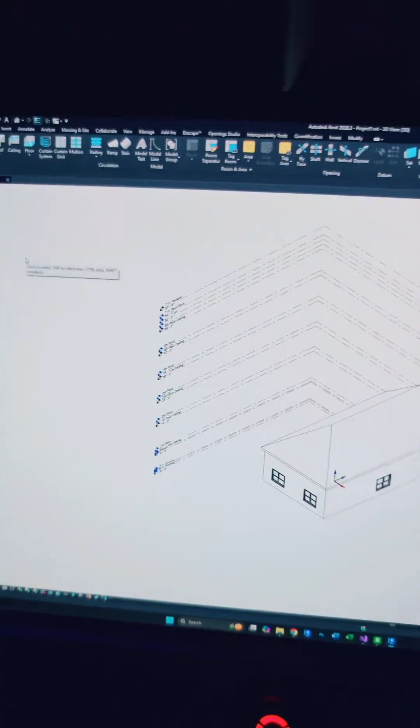Okay, so here's the model. Very simple. It's got a roof, it's got a floor, it's got walls, it's got a door, it's got windows.

So in the 3D view, I'm gonna go up here to add-ins, my external tools, my AnansiBuild. And then the first thing it does...

Sure, the first thing it does is check to see if, at a scale—and it's only doing a couple engineering scales right now—does it fit on the print bed? Of course, I'm being selfish, so I chose the print bed that I have set for myself.

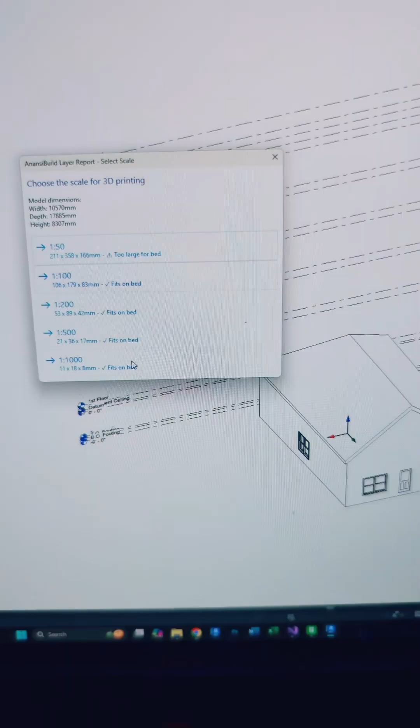So let's choose a different scale. I've done the 1 to 1,000, 1 to 100, 1 to 50. It doesn't fit. Let's do 1 to 200, just for the heck of it.

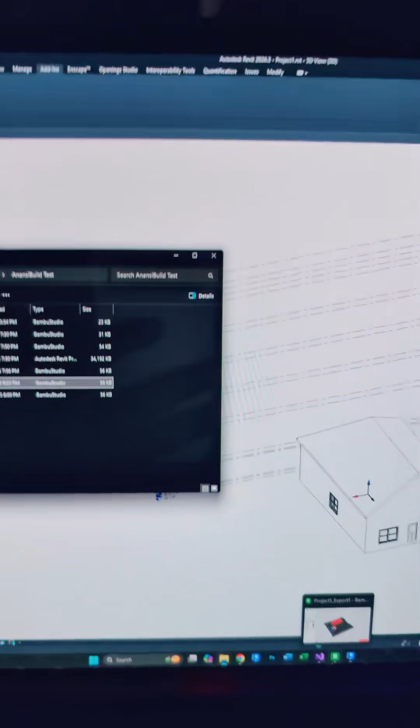I want to do a race with you. Okay, let's do a race. Where are we racing to? Just gonna open it, here it goes. And then, bingo bango, it's gonna give me a little—this was not made from Bambu, but that's fine.

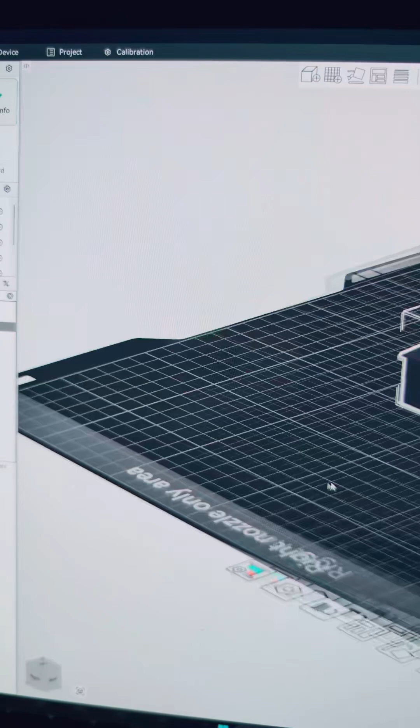Here's the model at 1 to 200 scale. Now here's where it gets interesting. I'm going to objects. Obviously there's the whole build assembly, but each of the assembly parts is a different part of the assembly.

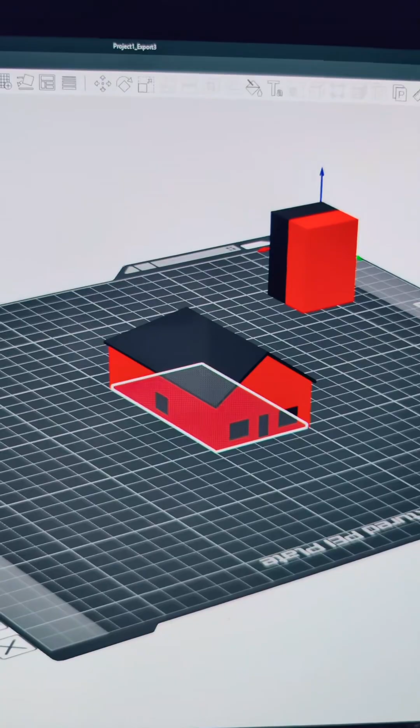So we've got walls, I can now assign a color to the walls. Let's go with this one, let's get this out of the way so we're not looking at it. Next up, the floor—maybe I want the floor to be, I don't know, purple. I want the roof to be, let's go blue.

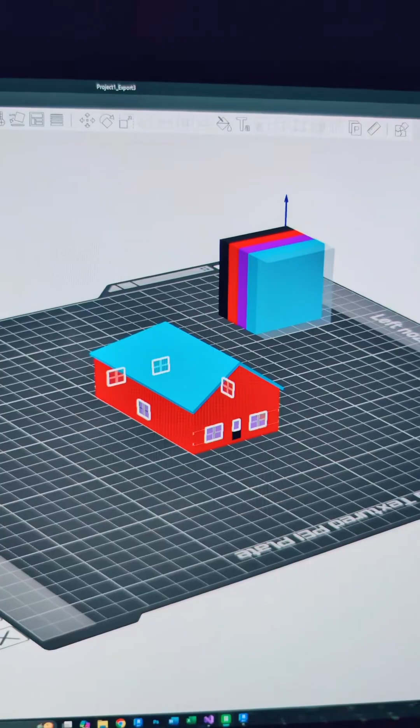The glass—I separated the glass elements from the doors and windows so I can assign my Bambu PLA translucent blue to the glass. Now the frames, I'm going to use, just for the heck of it, this wonderful brown wood filament. And then other elements, like the mullions and the handles and stuff—I don't know, let's make that white just for the gee willikers of it.

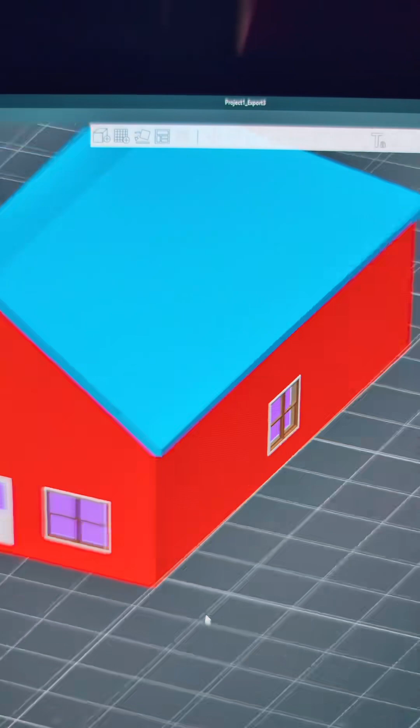The panel of the door, and there it is. It's the model in 6 parts that I can assign individual filaments to. That imports to scale, and maybe I want to slice this thing so I can look at it in section.

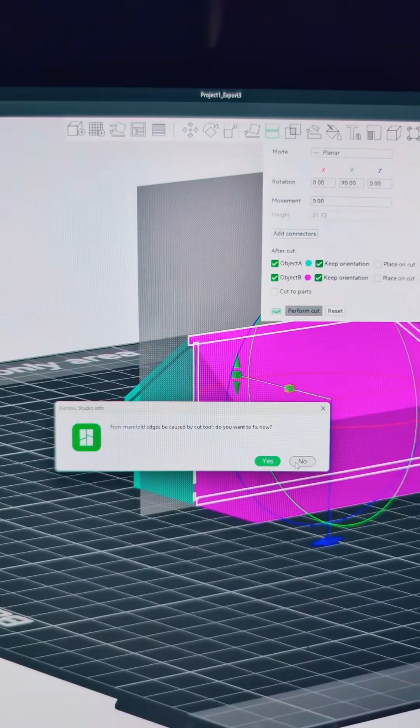Keep orientation, perform cut—no, I don't want to fix. Bam, there it is.

In section, so I can print it sectionally. Or I could turn that and do it in plan, but I haven't figured out a good joinery method for that, because like I've shown before, when you set it in plan, now you have these parts that just slide against each other.

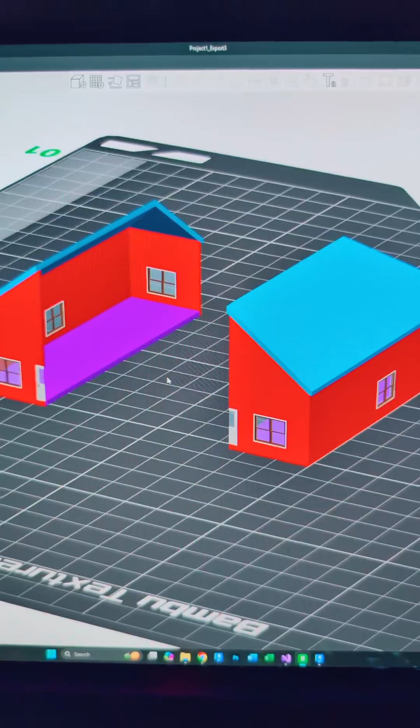But yeah, this is it. This is the main thing I was trying to do with the app—I mean the plugin I was trying to build. And yeah, this is exciting. I'm very excited, this is my very excited voice.

Oh Sophia, right there, just keep pushing. Oh perfect, oh yeah, you need a back push? I need a back push, girl, give me a good back push. All right, I need to walk away. I've been at this for too long, and it works, and I'm so happy.